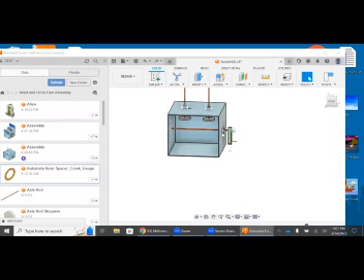We've already got the followers, the axle rod, the handle, the bushing, the box. We need the cams, and we're going to install something else, a roller spacer. We're going to talk about this. This is really important before we install the cams.

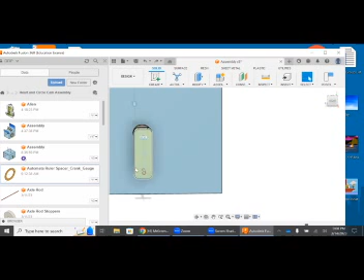Our crank needs to be at point 0. If you installed the handle the way I did, so the hole is along the axle, the handle is pointing straight down. If you installed it this way and it hasn't been turned, it should naturally be at the 0 position. If we zoom in, we can see that's 0 degrees. If we move it, you see the degrees move. So we need this to be at the 0 degree mark. Hopefully you saved it oriented that way.

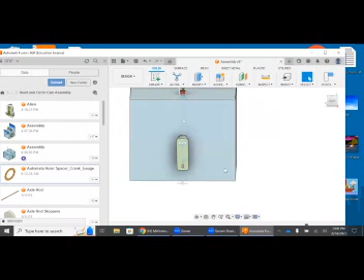So it needs to be this way before we can insert our next piece, which is going to be a roller spacer. It looks like this. I know from experience that this needs to be flipped 180 degrees, so we're going to go ahead and do that.

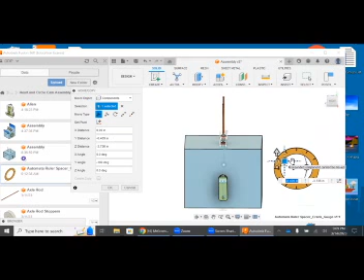This has some measurements on it, and the back side has backwards numbers. We want to make sure that this has the 270 here, this is 90 degrees, which will make this right here 0, and of course this is going to be our 180 right here.

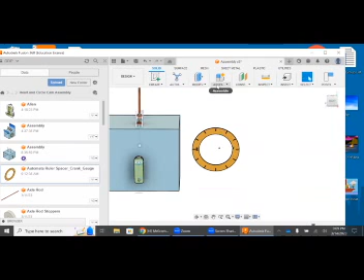So we're ready to assemble this to this side. I'm going to make a joint here, and I see that target appear right there, I'm just going to hit that. Then I'm going to zoom in. Let me close this data panel to give us more room.

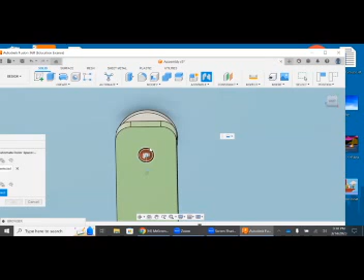I'm going to zoom way in and get the circle of the axle rod here. It's going to go there. Let's get a straight right view, and we want to center this. It's not all the way at the bottom, but it's centered right here in the handle. This looks good because the 0 and the 0 are aligned here.

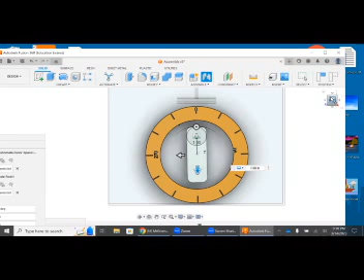This 270, it all looks oriented correctly. So what I'm going to do now is look at the side to see that it's flush as much as can be. We don't want it embedded into the box. Kind of seems that way, so I'm just going to make this 1.4. That seems better to me. I'm going to hit that and set that.

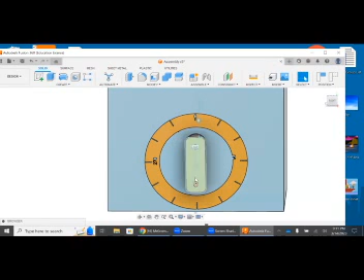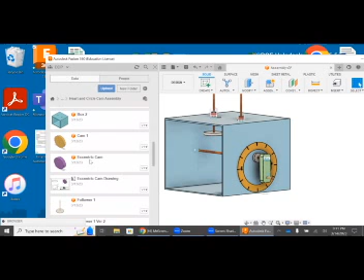So before we put our cams in, this has to be at 0 position, just so that's understood. When we put our cams in, let's insert our first cam. It needs to be put on the axle rod in the lowest position, meaning the shortest distance from the hole, or the point where the follower is going to be at its lowest point. So I'm going to install the eccentric cam.

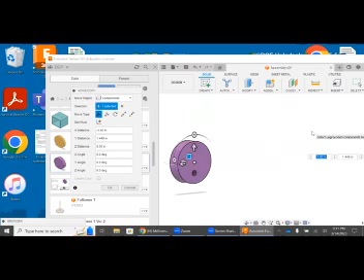I'm going to rotate it to the orientation, let's get that here, 90 degrees. I'm going to move it. I could just do it on this side, but what we want to consider when looking at our cams is where the lowest part is going to be with the follower. We can see that because there's the greatest distance.

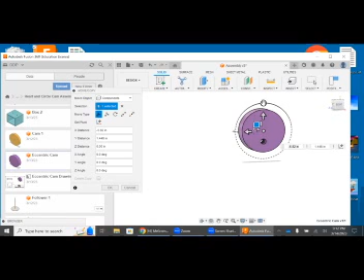Let me get a better view here. There's the greatest distance between the hole and this side, so this is going to be the maximum height right here. Whereas here, there's the shortest distance between the hole and the top, or the bottom. So we want to orient this, let's do it in 90 degrees, so this is going to be 180. The shortest, so this is going to be the lowest the follower is going to be, and that's the way we want this oriented.

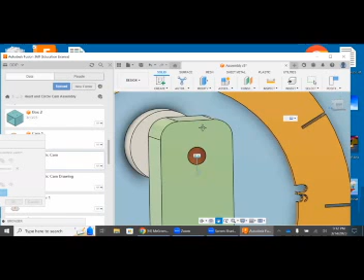So we're going to go to our assembly joint, we're going to get that circle right there. Let's go to the axle rod. Okay, we're going to throw that cam on there. Let's push it here.

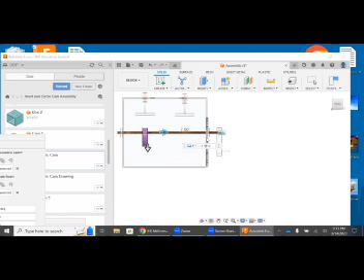So we want to move this so it's directly underneath the follower. Let's just play with the numbers a little. Okay, so let's try 0.5. That looks good, that looks good. I'm just going to set that. I see that the smallest displacement is here. That looks good to me.

All right, cool. Now I'm going to bring this follower down here, and I'm just going to bring this right there so it's touching. Then I'm going to move on to the next cam and we're going to go from there.

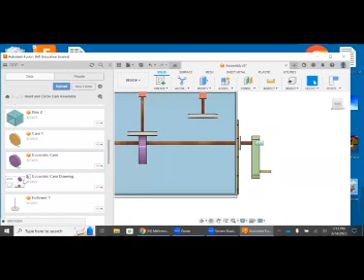So the next one I'm going to install is my heart cam, insert into the current design. This is going to take a little more figuring here. So let's first orient it 90 degrees. Here, let's get, there we go.

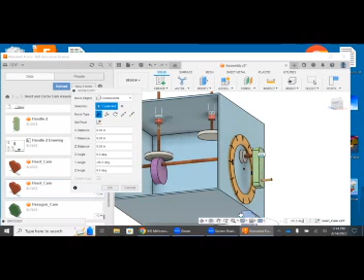All right, let's put this up. So we at least have it facing the right way, but now we want to consider where the lowest part of the follower is going to be.

One thing I can ascertain is at these points here, this is where the follower is going to rise, going to drop here, rise here, drop here, and then rise at this point here. So because it's going to rise here and here, there's not a lot of space before the next rise.

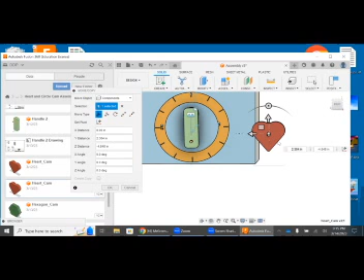So I'm going to ascertain that the lowest is going to be about here. I'm going to orientate it 90 degrees and see where that leaves me. Okay, so that leaves me at this bump right here. I know it's going to rise there, I want it to be more here, facing upwards.

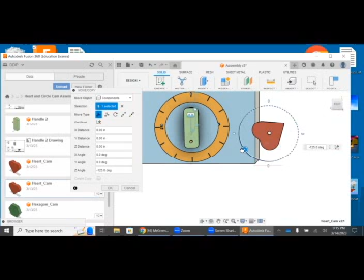Let's try something like 130, 135. No, let's do 120, something like that. Okay, actually I'm going to do 125, maybe 130. We're going to go with negative 130. All right, I'm going to go with it. Cool, so we have that set here.

I'm going to go to my joint, and let's get a good front view going. Okay, and see where we're at here. So that's 3. So let's try 5. Let's try there. That looks good.

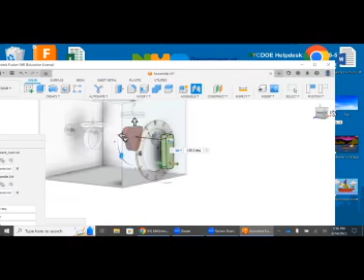Maybe we can rotate that a little more. I think right here is good. So this is a flat surface here, and I'm thinking right here when it comes down, that's going to be our lowest point right here.

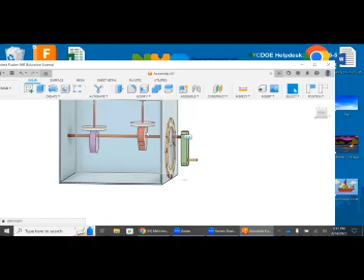Okay, so I'm going to set that. I'm going to bring this follower down as well. Let's just make sure it's right on top. All right, cool. So what we're going to do now is connect these together.

So we're going to go to our assemble, and this says new contact set, but at the very beginning it might say enable contact set. That's what you want to do first. So I've already been messing with this, so it says new contact set. So what we want is enable contact set.

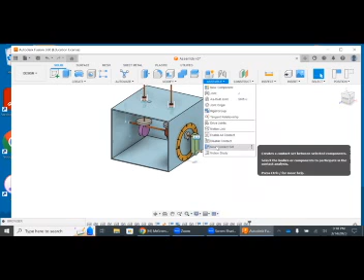Since I've already done that, you would do that, then you would go back into assemble and do new contact set. So what we're going to do is take this whole follower and this cam, and connect them together. We're going to hit OK. Now I'm going to go to the slider joint that's right here.

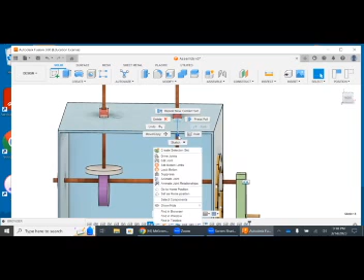Let you get a better look at that. And I'm going to right click and edit the motion limits here. All right, we're going to go to our rest. Okay, we're just going to mess around with this a little bit. I'm not sure what we're looking for.

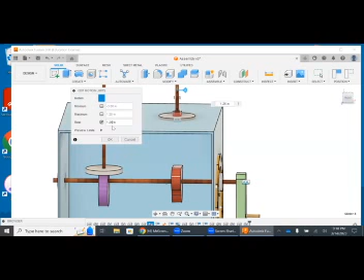Okay, so let's try 1. Okay, let's try 1.25. That didn't work. Let's try negative 1.25, let's try negative 1.5. Okay, good, good. What we want is for this follower to be embedded in this just a little bit, okay?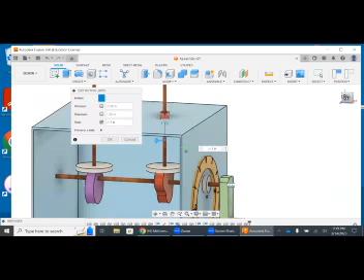So let me try 1.7. All right, so now it's kind of inside the cam like that. That looks good to me. We want it kind of inside, but not so far that it's anywhere near the axle rod. So I'm going to hit okay, and it's just going to bounce right back up here, all right?

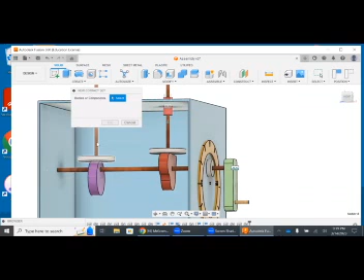Now I'm going to do the same thing to this. I'm going to assemble, new contact set. I'm going to choose my follower, choose my cam, hit OK. I'm going to go to my slider joint, go to edit motion limits, go to my rest. Again, I'm not really sure.

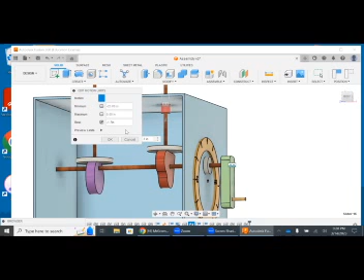I'm going to try 1.7. All right, and that is looking pretty good. I'm going to do 1.75. All right, cool. Hit OK, it's going to pop back up. Now let's see what we got here.

All right, I had just paused the video to bring a more complete model out so you can see how all the parts are going to move together with the visuals as well, and it'll give you a more complete sense of how this is all going to come together.

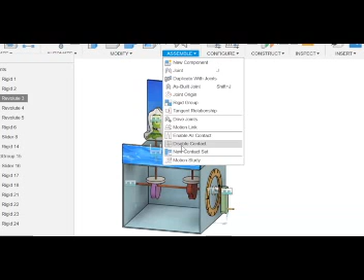So up until now, you had joined these different parts by going into assemble, and this new contact should have said enable contact set at the very beginning. Then you close it, go back to new contact set, then you chose the follower, the cam, and did the same thing for your other cams, and then adjusted the motion limits of your joint sliders right here.

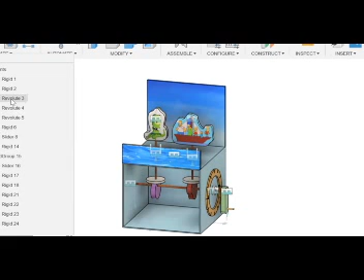Once that's all been done, in order for all of the parts to move together, we're going to go to our browser, and under joints we're going to do the drop down menu, go to Revolute, and do animate joint relationships. And that is how all of the motion should be. Of course, yours is going to look much different with different motion, different cams, different visuals, but this is a good idea of what we're looking for as a finish.

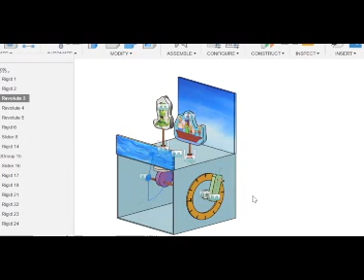Also, just to point out, this ruler spacer here is not moving with the handle, and it shouldn't be. So this is what we're looking for.

So the deliverables for this assignment is a screenshot, an isometric view, but we want to also see the cam, so we want to tilt it so we could see the cams, the right side and the top. We want to do an exploded view drawing. You should have made a new component for each of these parts and named it, so there should be a parts table that has the name of each of these different components.

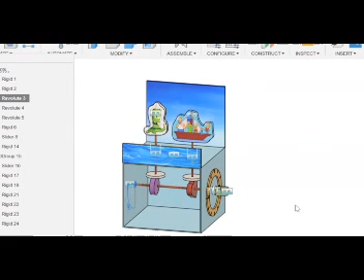Lastly, you're going to make a video of this motion right here once you animate the whole model, and that is going to be submitted to the Google Classroom assignment. The first two that I mentioned, the screenshot and the exploded view, will be submitted to the engineer's notebook. And after this is completed, we're going to move on to starting our physical model. See you there.